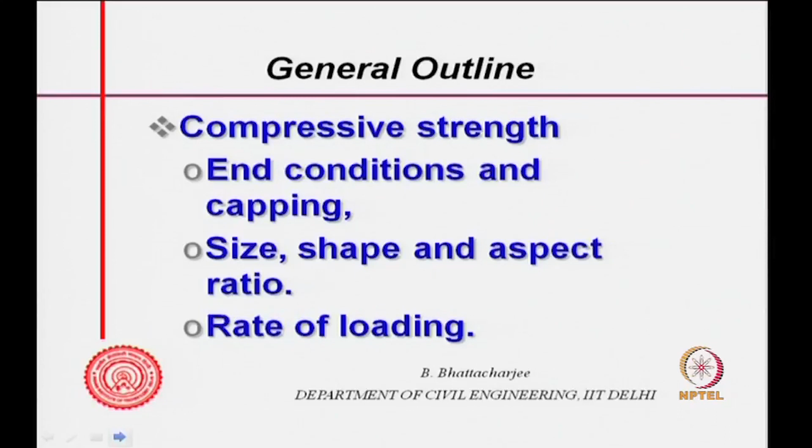So the general outline: for compressive strength, the factors which affect it are end condition and capping of the specimen, size, shape and aspect ratio of the specimen, and rate of loading. Then we will look into some aspects related to tensile strength testing.

For the compressive test, what we do is take a cube and apply load from top and bottom in a testing machine, where the load is applied through a hydraulic system, and we can also control the rate of loading, etcetera.

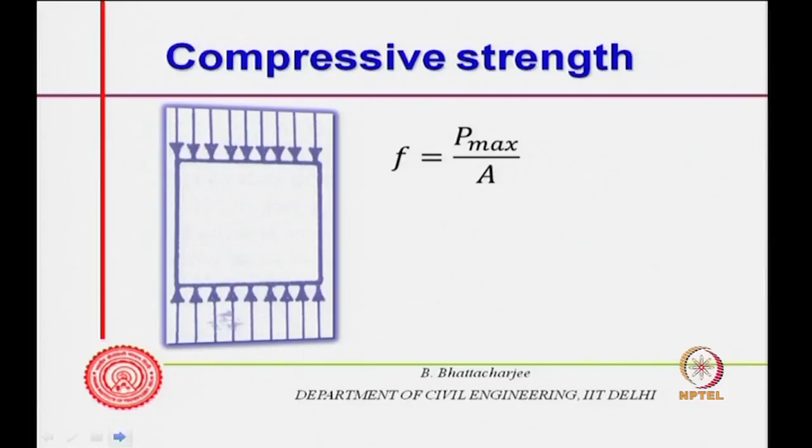So we apply load like this and define the strength as P max by A, that is a simple way of doing that. Test conditions induce variation in results, and that is what we are going to see.

Of course, therefore, I must have a standard test condition. If you recall, we talked earlier that the cube strength you get is not really a measure of the strength in the structure, because several factors affect strength in the structure differently from that obtained from the cube test. The levels of those factors are not the same, but it gives us a relative measure of the materials that have gone into concrete making.

Since the test condition affects my strength, I must standardize this test condition and use the same condition for all the cubes, so that I can only compare the materials.

So the standard test condition is given in codes. In the Indian scenario, it is given in IS 516, originally framed in 1959 or so, but reaffirmed possibly sometime in 2009. So it remains the same, still.

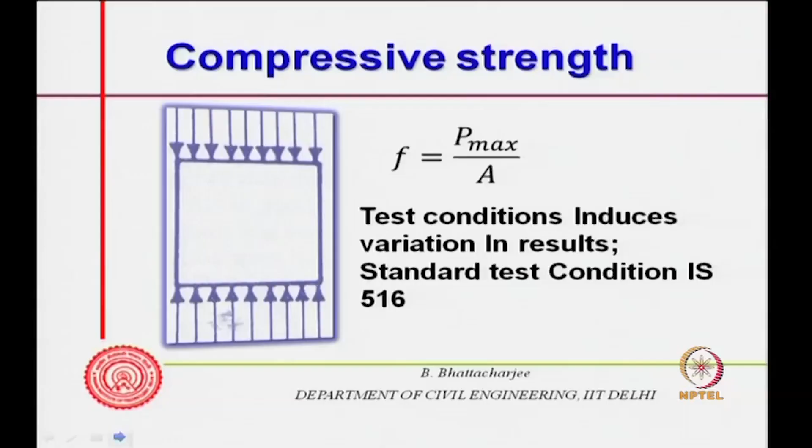What we do is apply a uniformly distributed load from the top on the cube surface, and at the bottom we assume there is a uniformly distributed reaction from the machine frame or machine plate. We apply the load also through the machine plate, and as we apply it, the reaction comes from the bottom and the concrete cube is crushed under those two loads.

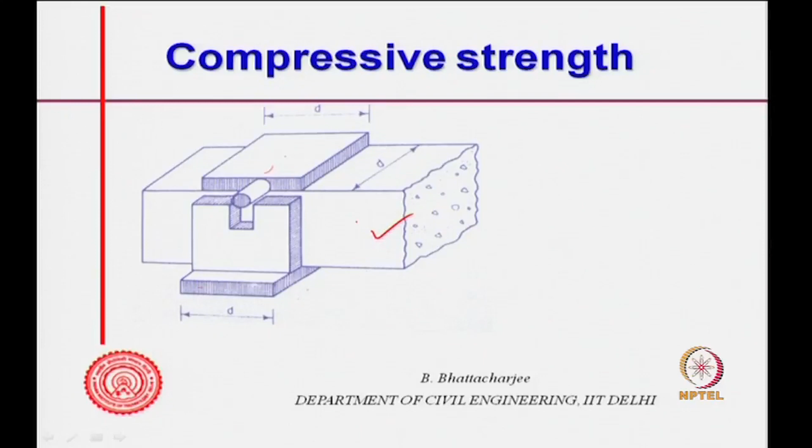Remember, this result is not the same thing. IS 516 gives a test on a portion of a beam which is not the same as the cube test; these two things are not the same. They give different strengths. But anyway, that is good enough for our purpose, because we are relatively comparing.

So compare these results only with other beam results, and compare cube strength results only with other cube strength results. Now, this beam method is not so popular, while the cube test is very popular, most commonly used. The beam portion test is rarely used actually.

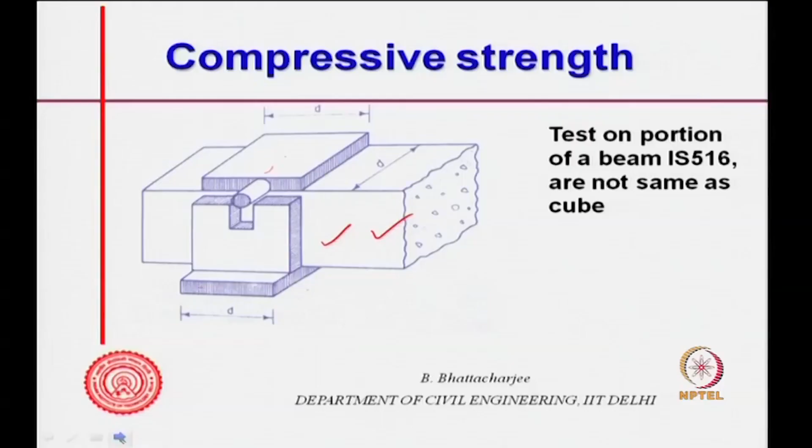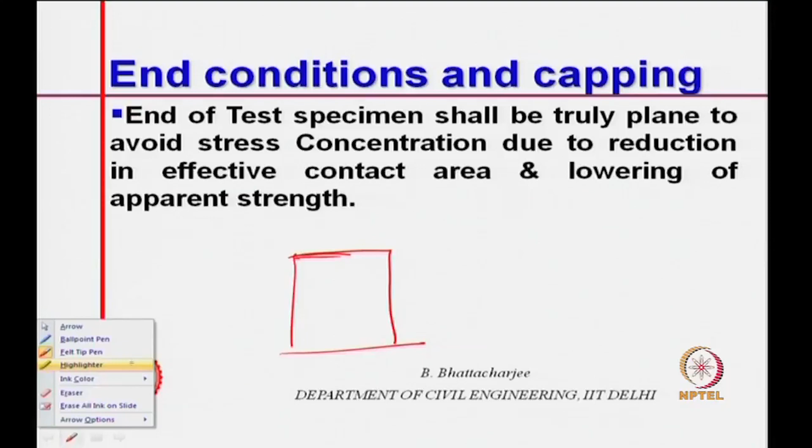Now, end condition and capping. End of test specimen shall be truly plane, first of all, this should be truly plane. This portion should be truly plane. Otherwise, the undulation, the contact area would reduce and there will be stress concentration, so effective contact area will reduce and apparent strength will reduce. So, therefore, this must be plane.

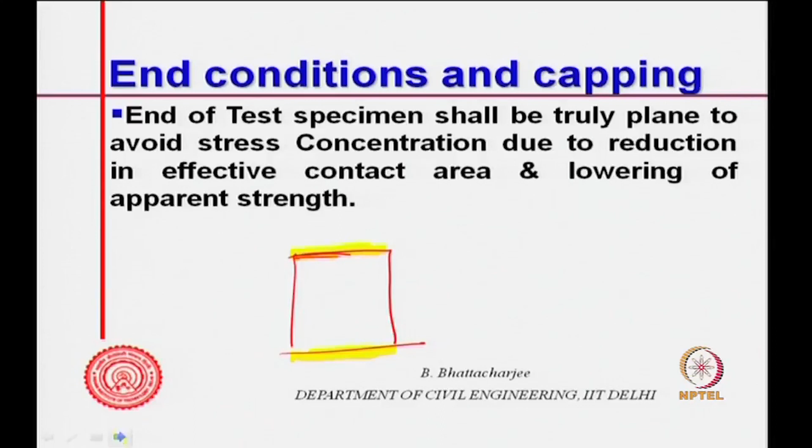And to do that, what we do is we cast against steel mold surfaces which are smooth, and therefore, it does not require any treatment. I will talk about capping a little bit later on. This is very smooth, and I put that below the loading plates, what we call loading platens. This portion was in contact with the steel mold during casting and not exposed to air. So, this will remain by and large plane if my molds are standardized and properly made within tolerances.

While we can do this for cubes, well, cylinder actually you cast in this manner, so this surface is always exposed. So, we apply load however through this. Anyway, for the cylinder scenario we can't avoid this, but we have to see that it is sufficiently smooth, there is no variation. Now that is as far as cubes and cylinders, largely cubes, are concerned.

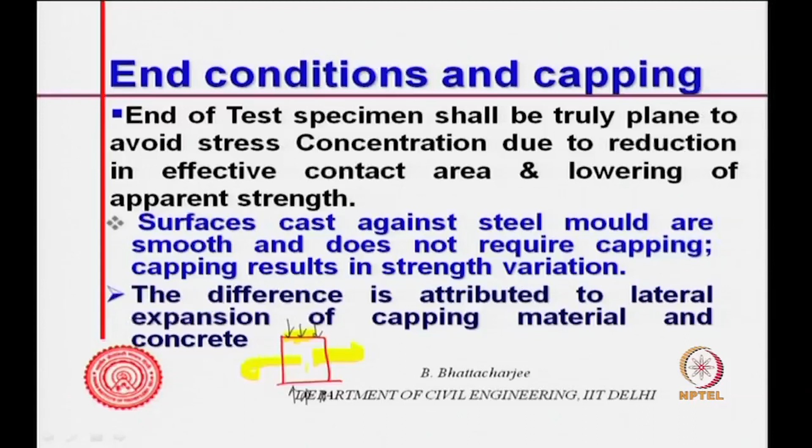Now, this variation or the difference that we get is attributed to lateral expansion of the capping material and concrete, relative to each other, both can be expanding. So, what you are doing when you are applying load on this, material here would be actually expanding. So, if you put a capping material here, this will also expand and concrete will also expand. It is related to this sort of expansion of the capping material and concrete. Let us see how it is, we will see right now how it affects.

Supposing I put different capping material, let us say first is alumina cement. So, I have made actually cubes or cylinders like this, and I am using different capping material here. They might be rough, may not have been smooth, etc. I am using different materials, whichever way, this is a result of experimental results. So, I am actually doing some capping, and the first material that I am talking of is alumina cement.

And the second one is gypsum plaster, third one is another gypsum plaster, fourth one is sulfur with filler, sulfur concrete with some filler, sulfur actually colloidal sulfur, yellow sulfur you might have seen, it actually melts. So, you put some aggregate into it, some filler, then it becomes almost concrete when it solidifies. So, the sulfur concrete. So, I can put some sulfur, plaster of Paris, calcium sulphate 2H2O that we know, and POP plaster of Paris with ordinary Portland cement.

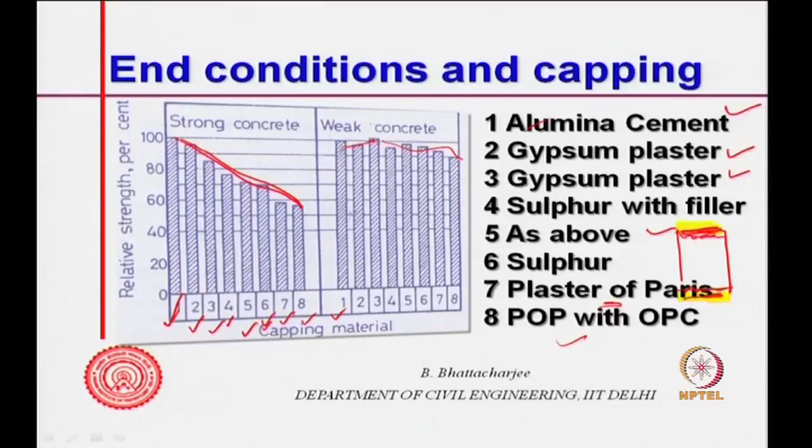So, you see if you have different capping materials, same cubes or same cylinder, if you look at relative strength, assuming high alumina cement gives 100% strength, for strong concrete it goes on reducing with the capping material, and for weak concrete the effect is somewhat less, in fact you find a slight increase. Well, this is a qualitative statement, not a quantitative one.

So, what we observe is that there is a variation, and it depends upon the type of capping that you are using. So, end capping has an effect on end condition.

Normally, if you do not have a capping, the machine plates are straight away coming in contact with the top and bottom, which are usually steel. So, you have steel plates, they come in contact with the

specimen itself, I mean the sample specimen itself, all right. Not sample, specimen, because sample would be a couple of specimens that would make a sample. So, specimen is from the sample actually. So, specimen, specimen itself, all right.

So, this is what is happening, machine plates coming in, and depending upon strong or weak concrete, the effect will depend. So, you see it depends both on the strength of the concrete, the quality of the concrete, as well as the effect of the capping material, which is again a function of the strength of concrete.

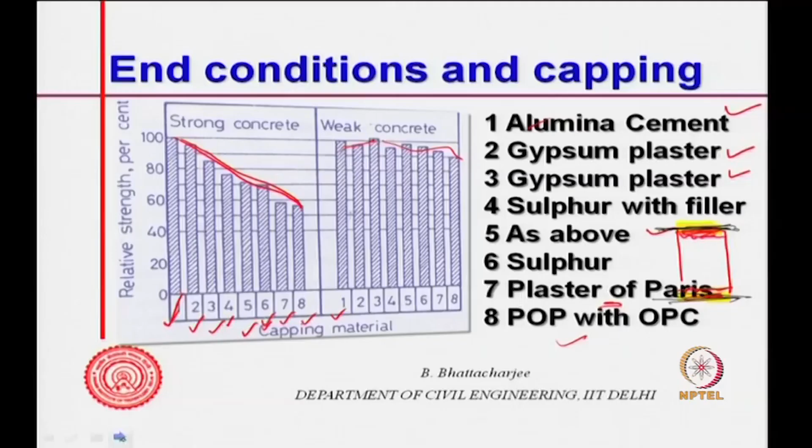It is a kind of non-linear situation. So, that is what it is, and therefore, this is an important issue - end condition and capping. Now, what is the mechanism?

Let us see if I have some diagram - some diagram right now I do not have perhaps. So, no problem, but explanation is there. Let me use my own diagram. Let me use my own diagram. Okay, the observation is, let us first use this diagram and then I will come back to it.

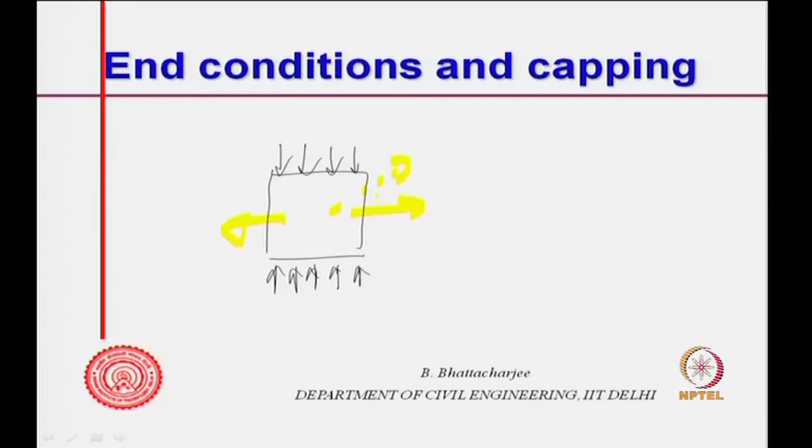Now, this is your cube, you are applying load like this, and we have discussed that my material will have a tendency, under this uniaxial compressive situation, to move along this direction as well as along these two transverse directions.

Now, if it tries to move along this direction, that means finally the failure is because of tension. Then the movement of this material along this direction is important.

Now, at this point, the movement of the material is restricted by the friction between the machine plate and the specimen. So, there is a kind of force acting like this - frictional force - which will not allow this movement.

Similarly, here this is a kind of frictional force which will not allow it to move along this direction. So, there is the surface, but then the surface material is in contact with the just-below next layer of concrete. So, if there is a force acting and it is trying to expand,

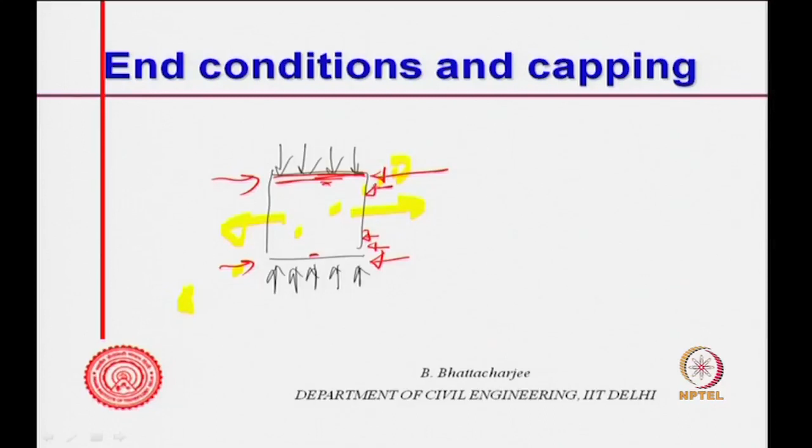it would also try to take the material below, but if there is a force opposing, this also will be opposed somewhat, but it would gradually get reduced. There is some sort of opposition to the movement here also, but gradually it will get reduced. In other words, these resisting forces would get reduced somewhat.

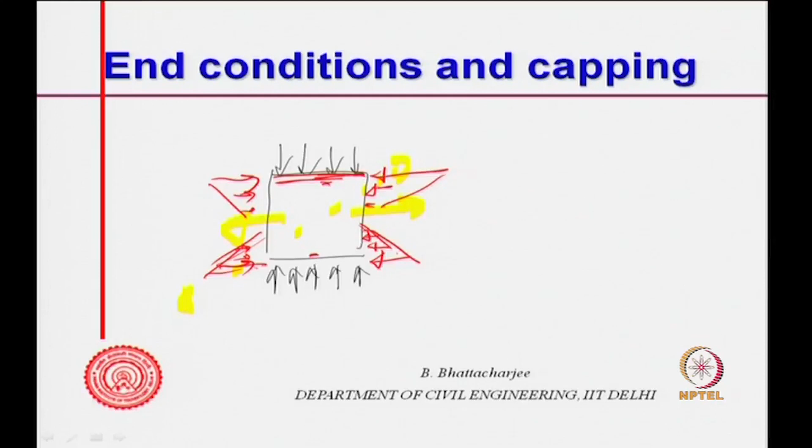So, you do not really have a purely uniaxial situation, you have a situation where there is some sort of force acting onto the specimen, depending upon the type of specimen, or L by D, up to some height there is a force acting like this also. This will depend upon this being your L and this your D, the dimension of the cube. So if it is D and D, then there is somewhat overlap, we will come to that just now.

So, you see there is an opposing force to the movement - horizontal movement or transverse movement - there is opposing force to transverse movement, both in this direction as well as in this direction there will be an opposing force.

So this opposing force, what effect does it have? The net effect is a compressive force acting like this at this point. Tension force will act normal to it, so it acts like this, and here also like this. Tension acts this way because compression is along this direction, net force due to the resultant of frictional resistance and the applied load.

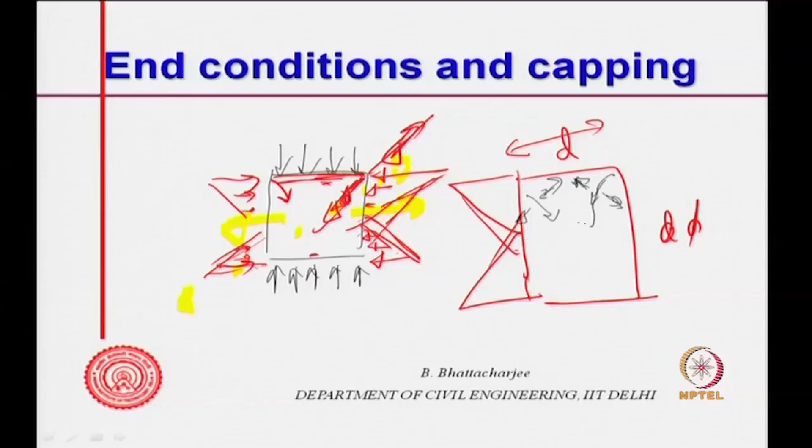Now, suppose I put a capping material here. Now the machine plate is not in direct contact with the specimen. The friction is between the machine plate and this capping material - the load comes from here and friction is somewhere here. So this material will try to expand in this manner, but will be resisted by the friction.

So it is Poisson's ratio which causes deformation along the transverse direction, and the stiffness of the material is an important issue. If it moves quite a bit compared to the stiffness, resistance to movement is less - that's a material property. For a given force, with different capping materials, the more it moves, the more it will cause the concrete to move along this direction.

So, in other words, let me put it here: higher nu, where nu is the Poisson's ratio, divided by E, the modulus of elasticity - more modulus of elasticity means less movement. So nu by E is the important ratio.

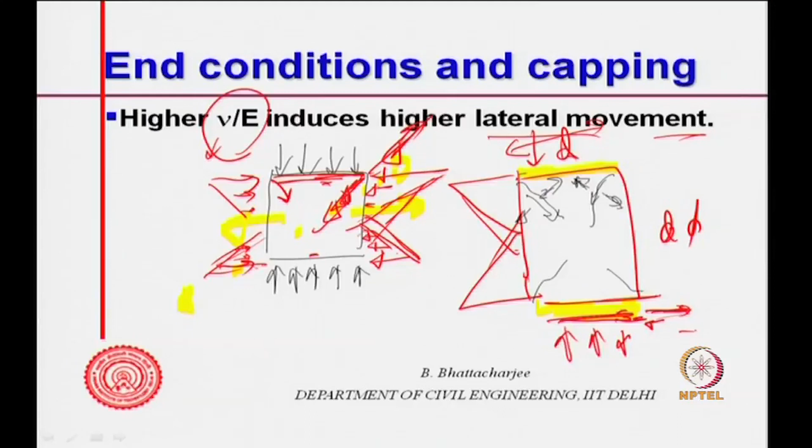If this is less, this term is going to be higher, and if this is more, this term is going to be higher. So higher nu by E induces higher lateral movement. That is what we have understood.

Softer and weaker material has higher expansion, and their lateral expansion is more than that of concrete. Therefore, if that moves, concrete will automatically also move, and the Platen effect will get reduced significantly. Softer and weaker material will reduce the Platen effect.

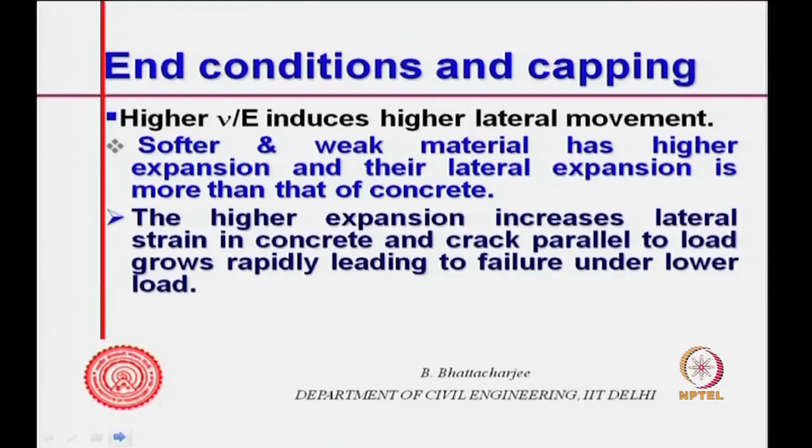The higher expansion increases lateral strain in concrete, and cracks parallel to the load grow rapidly, leading to failure under lower load. So if you use a higher nu by E material, that is, softer and weaker material, as a capping material, it will itself expand and will not restrain the expansion of concrete under the Poisson's effect. Therefore, concrete will show vertical cracks parallel to the downward load, and failure will progress under that kind of load.

For a strong capping material, the result is opposite. If nu by E is small, meaning the material has low Poisson's ratio and high E, very stiff, a stronger material has this behavior and would restrain the concrete, showing higher strength compared to the one with higher nu by E, because it restrains the expansion. The net effect is the material does not expand in the transverse direction, there is a restraint to that, so you require a higher load to cause failure.

So this is the effect of end capping, as we have seen. The end platens of the machine produce the same effect as a strong capping material.

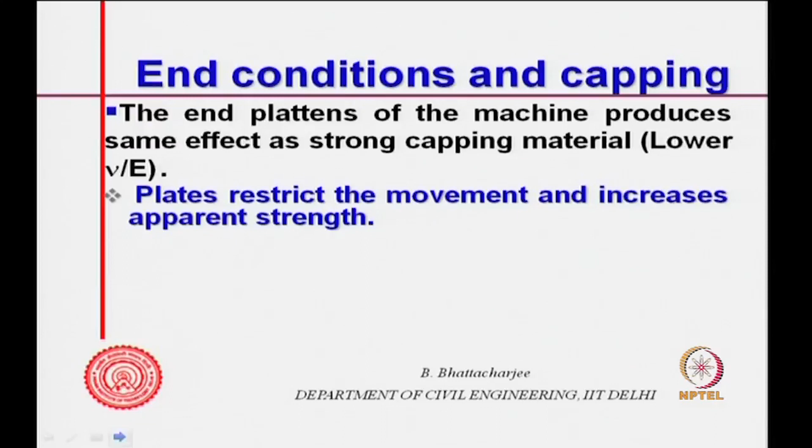The capping end platens, machine platens - because steel is a strong material, its Poisson's ratio divided by modulus of elasticity is relatively low if there is no capping material. Therefore, the plate restricts the movement and increases apparent strength.

So the degree of restraint depends on friction between plates and concrete surface, and for very low restraint capping material, wax - let us say if we put wax, the difference is quite evident from the cracking pattern. Wax has very low restraint, it does not restrain because it is low strength, weak material expands quite a lot, and therefore you find almost vertical cracks.

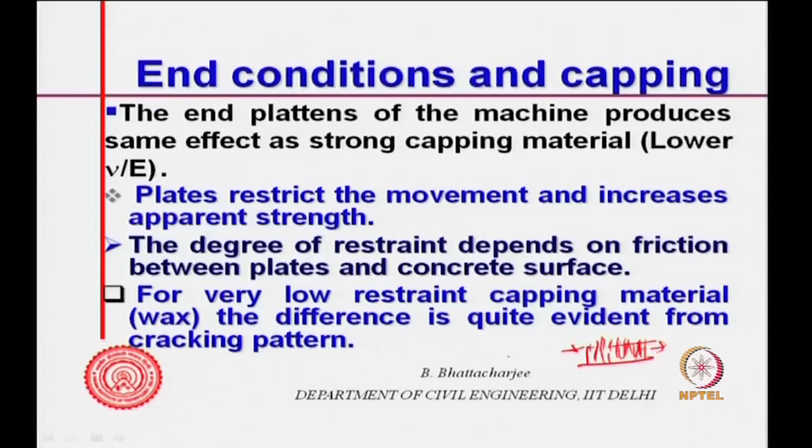Something similar, for example rubber or Teflon - it has high strength but low stiffness, so it allows expansion but does not fail itself, and therefore the effect of the plates is gone. There is something called brush platens, made of closely placed brush. You use a brush below the plate, so it can expand easily, being a steel brush, although it will not fail. That is the platen effect basically.

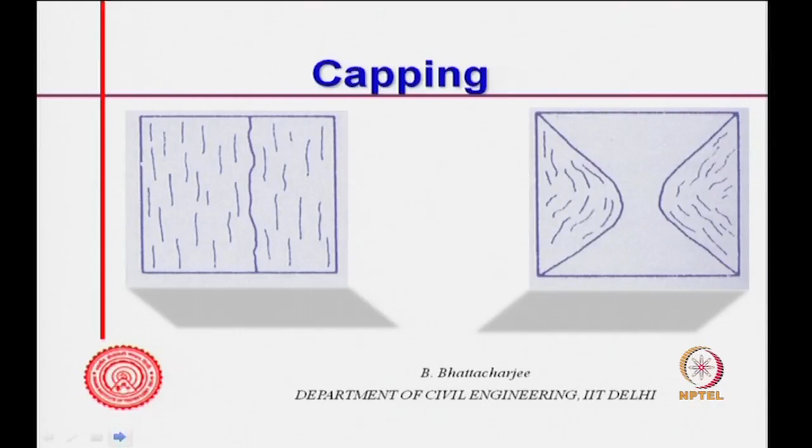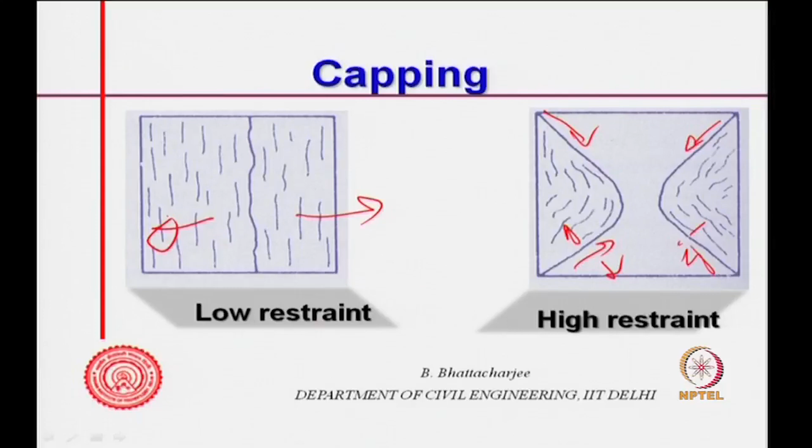If you have no effect, no capping, no restraint practically, versus high restraint - these are the scenarios: low restraint, high restraint. With high restraint, net compression will be along this direction as a resultant force, so transverse tension will act like this, giving you something of this kind. With low restraint - wax or Teflon or brush platen effect - cracks would be vertical because of the failure due to Poisson's effect. This aspect has to be taken into account.

So we got the failure of the cube like this - this is the cube failure, as shown earlier. In the beginning, cracks will come like this, then this is the shape that you get, and in some cases you go further and get a shape like this. This is the portion which does not get failed - this is the final portion. So the platen effect acts like this.

Due to the platen effect, it is like this, but the restrictive effect is limited up to a certain distance from the plate. What is important is L by D. Up to a certain portion this is effective - this platen effect acts up to a certain point, it does not act over the full length. In this direction also it will be there, acting like this.

Now how much is this distance? This distance is related to d - it has been observed that up to about 0.86 d, the end of the cylinder diameter, this effect will be there. So if this is d, this distance will be 0.86 d on this side, and 0.86 d on this side also.

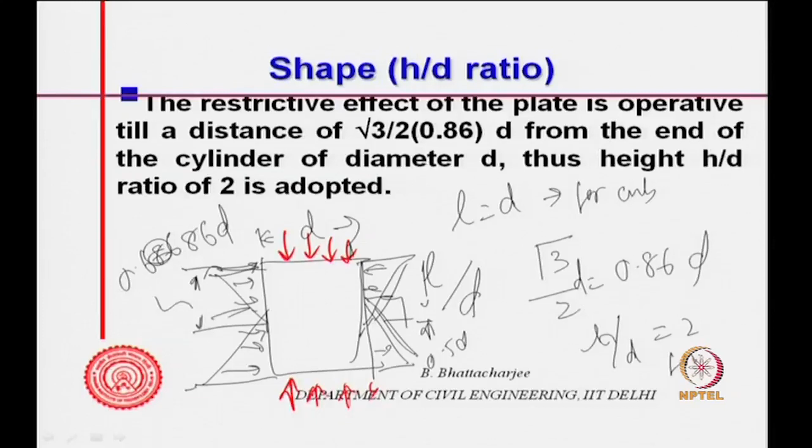So, in that case what is happening? A cylinder, h is equals to 2d, at least this is 2d, the platen effect will finish up to 0.86d. So, this is 0.86d and so on.

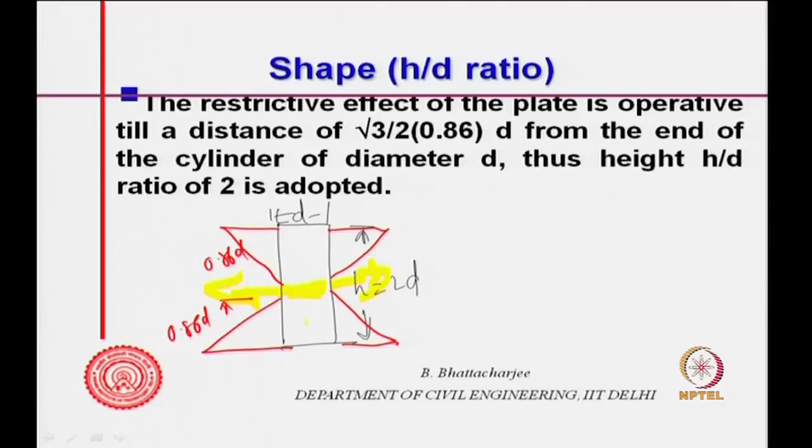So, there is some portion where you have no platen effect, it will expand easily, along this direction. So, therefore, we adopt h by d equals to 2 and we find the strength is lower, in case of cylinder, right, strength is lower in case of cylinder.

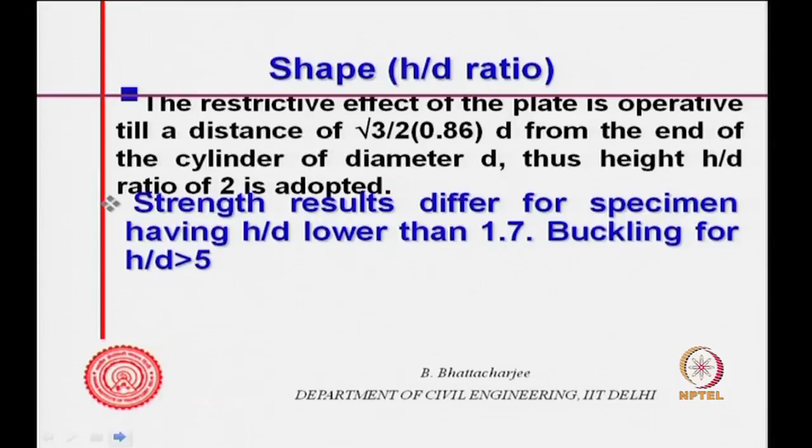Okay, so strength is lower in case of cylinder. Strength result differs for specimen having h by d lower than 1.7. When we ask why it is lower, some people say buckling. Well, buckling occurs when h by d is greater than 5. So, it is simply because of platen effect, cylinder strength is lower than cube strength, right, cylinder strength is lower than cube strength.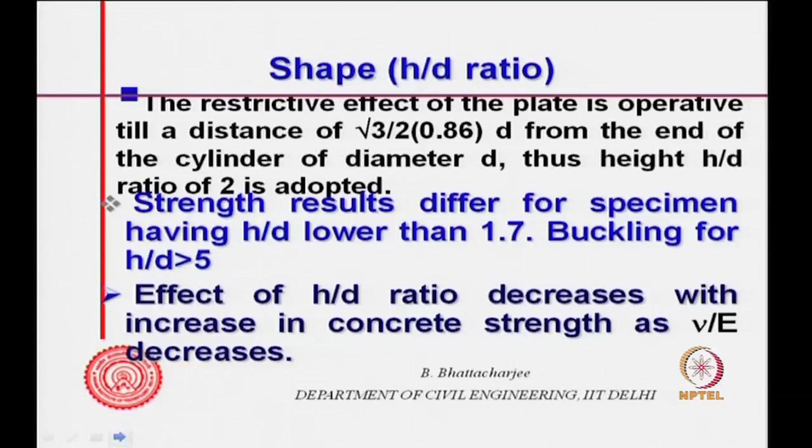Effect of h by d ratio decreases with increase in concrete strength as nu by E decreases. So, if you have higher strength concrete, E is more, nu is also relatively lower, so nu by E will be lower for higher strength concrete. So, this nu by E increases depending upon the concrete itself, because expansion of the concrete is important, right.

In weak concrete, restraining effect will be more, because it wants to expand, but if you are not allowing it, this effect will be more, and you can see how the capping material has actually affected it. So, depending upon the strength of the concrete, relative motion of the concrete with respect to the capping material would differ, and that is what it is.

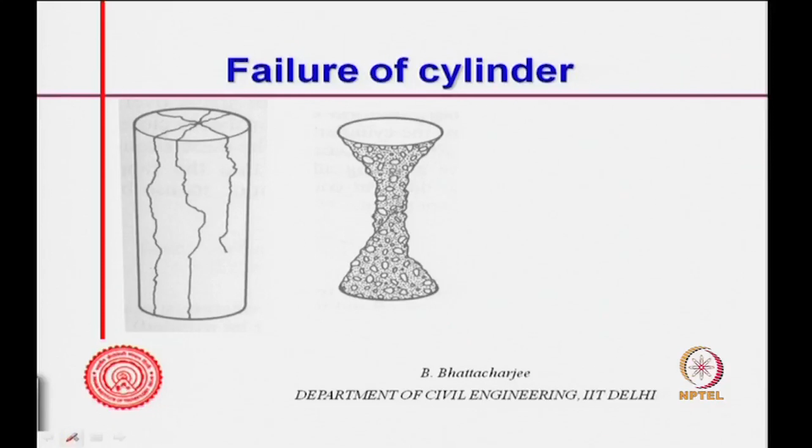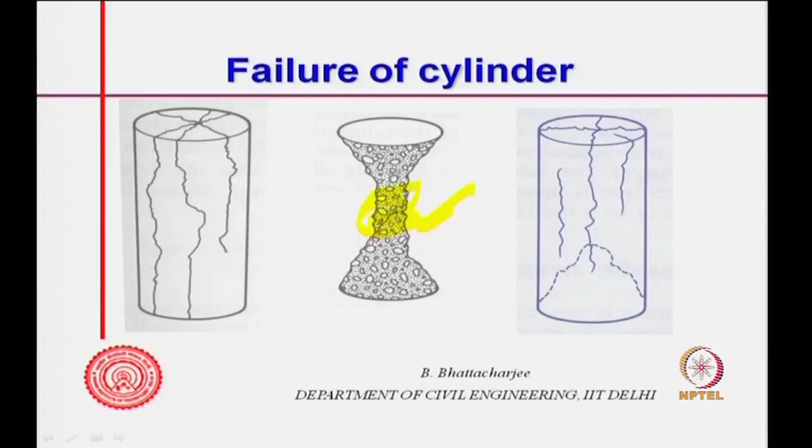So, in failure of the cylinder, you will always see vertical cracks somewhere. You might see something of this kind, and you might see something of this sort. So, cylinder failure pattern is something of this kind. That is because in that portion there is hardly any platen effect, and therefore, it shows vertical failure pattern.

People have done some experiments, and it has been observed that as you increase the h by d ratio, height to diameter ratio, relative strength changes. If at 2 it is 1, at 0.5 L by D ratio, it is something like this, and it also depends upon the strength. For example, higher the strength, behavior is somewhere here, lower strength behavior is somewhere here.

So, that is because of the L by D ratio effect. Similarly, if you have a situation where you put in some packing, earlier this was related to H by D ratio; we have changed that. So, we have said that if the H by D ratio is high, platen effect reduces, and therefore, strength tends to become similar. Now, if I put some packing, same aspect of capping actually, first case is no packing, second case is 8 millimeter soft board.

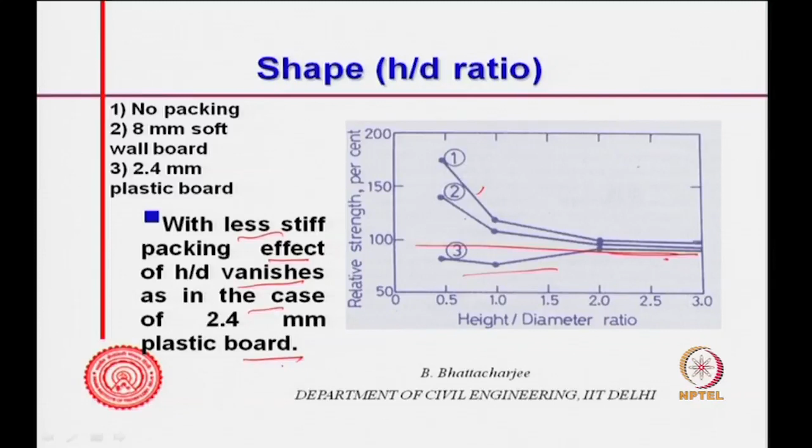With less stiff packing, the effect of H by D vanishes, as in the case of plastic board, because plastic board has got low modulus of elasticity and high Poisson's ratio, so nu by E is now actually large. So it can deform itself and allow the concrete to expand, and therefore this effect is simply not there, or very little. This is what L by D ratio, cylinder strength and all that relates to.

When you are measuring cores, as I said sometime we do testing of core, you are measuring the strength of the core, and different H by D ratios exist. If you consider this as 1, American Society of Testing Material gives a correction factor: for 2 it is 1, correction factor for 1 is 0.91. That means the cylinder with an L by D ratio equal to 1 would exhibit higher strength, so the multiplying factor is 0.91.

So convert the cylinder, convert the L by D ratio - this is L, this is D - so convert strength obtained for L by D ratio 1 cylinder to L by D ratio 2. What you do: you multiply this by 0.91. So you can see the strength is higher by 1 by 0.91, around 10-11% higher according to ASTM code. This is of course judgmental. If you see British code, this is 1 by 0.92, Indian standard 516, 0.89.

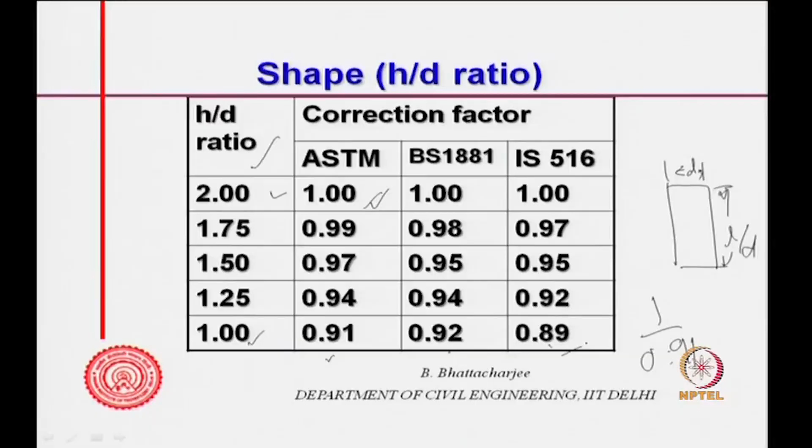Everybody takes somewhat lower value. That is, of course, for core.

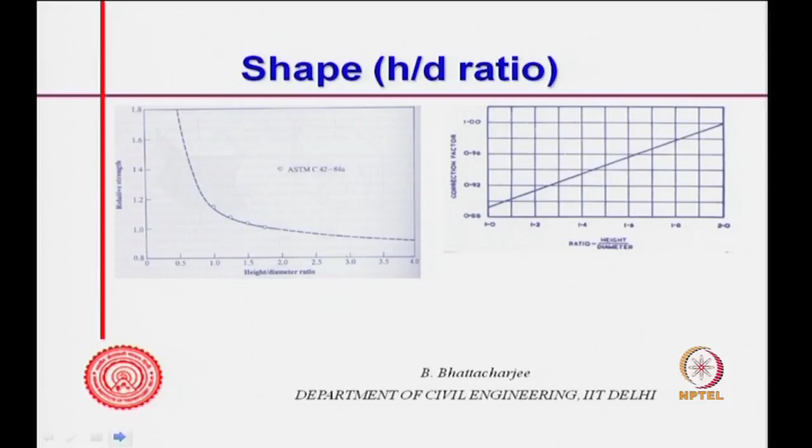Now a lot of people have actually tried to find out the ratio of cylinder strength to cube strength, at what point they are same. Obviously it will show large scatter, but typically it varies with the strength. Higher the strength, the relative cylinder to cube strength ratio increases, because capping and platen effect are also functions of the strength. But normally in general we use 0.8 as the ratio of cylinder to cube strength.

So specimen shape has got a role, capping has got a role. While Indian standard uses a 15 centimeter side length cube, some other places use a 15 centimeter diameter cylinder, their strength would not be same. So it depends upon specimen type, L by D ratio, and also what kind of capping you are using. Long cracks initiate fracture earlier in a larger specimen.

Now size is the other issue - dimension of the specimen. If the specimen size is large, then it fails at lower load. Why? Because long cracks initiate fracture earlier. So in a larger specimen you are likely to find a longer crack or longer fissure right in the beginning, and therefore in a larger specimen one is likely to find a longer crack, thus lower strength results. This is something called the size effect. Larger the size, lesser is the strength.

Experimental data for cylinders exhibit reduction in strength compared to a 150 mm specimen for larger diameter. So if one does this systematically - but then the error is so much in our normal testing that capturing the variation is not very easy. You have to do a lot of tests actually.

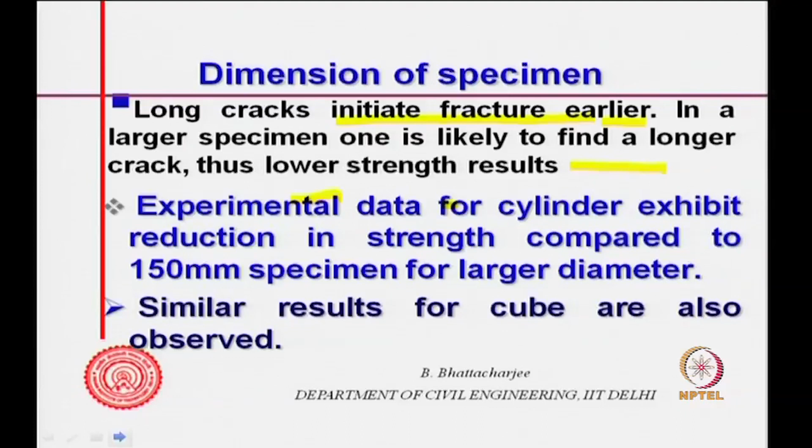For example, just doing 3 cubes of 10 centimeter side length, 3 cubes of side length 150 mm, and 3 cubes of side length, let us say, 200 mm - so 9 cubes you test, 3 of each size, and find out the mean. You may not find the variation, because the error in the tests, due to all the factors involved, may simply mask the effect of size. But if you do a large number of tests, then this effect you do see. So people have done some testing and observed this for cylinders and cubes as well. Let us see what these are.

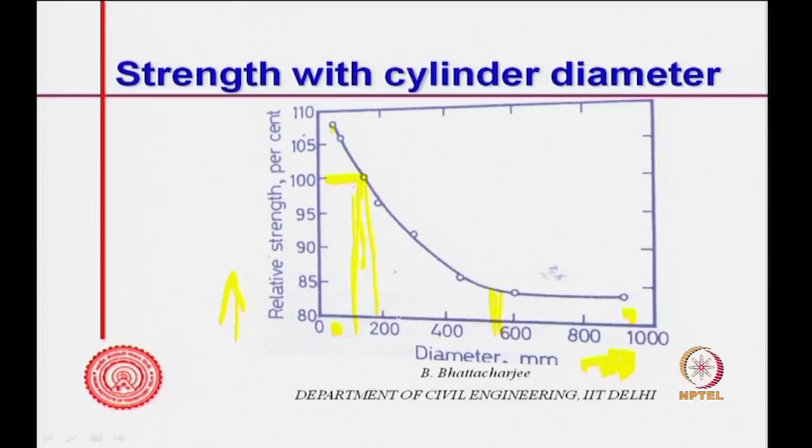For cylinders, it has been observed that if diameter increases, assuming 100 corresponds to a 150 mm cylinder, the relative strength changes. If the size is smaller, strength is higher; if size is larger, strength is lower, but beyond 400 and 500 mm diameter, strength does not change because the crack sizes are unlikely to increase further. This is the observation for cylinders, which is why size is standardized.

For cubes, some results are available. Say the side length is 70 mm, then relative strength is 1.0; for 100 to 150 mm it is also 1; for 200 mm maybe 0.95; for 300 mm, 0.90. So you can see the size of the cube is important.

If you are using a 150 mm cube size, which is standard, that cannot be compared with any other size. Some European codes and many countries allow testing different sizes of cubes, but this is only for comparison purposes, and only with the same size. Supposing I am using a 100 mm cube, I must compare different concretes using 100 mm cubes only. In Indian scenario, we use 150 mm cube, but in laboratory sometimes people might use 100 mm cube, and then 100 mm cube results have to be translated to 150 mm cube results.

It is not the same. Similarly, for cylinders, somebody might use 100 mm diameter by 200 mm length, h equals 200, or somebody might use 150 by 300, which is standard in many countries, but then comparison must be 100 mm dia to 100 mm dia, 150 mm dia to 150 mm dia. So size is important. This is the other test factor which is very important.

So loading rate is also important, and many people seem to miss this. The testing machine used for cube test specimens in concrete construction must have a mechanism to control the rate. Ultimate strain is attained early at a lower rate of loading due to creep. Supposing we assume that strain is where fracture occurs, the rate of loading has a relation, a kind of effect on strength.

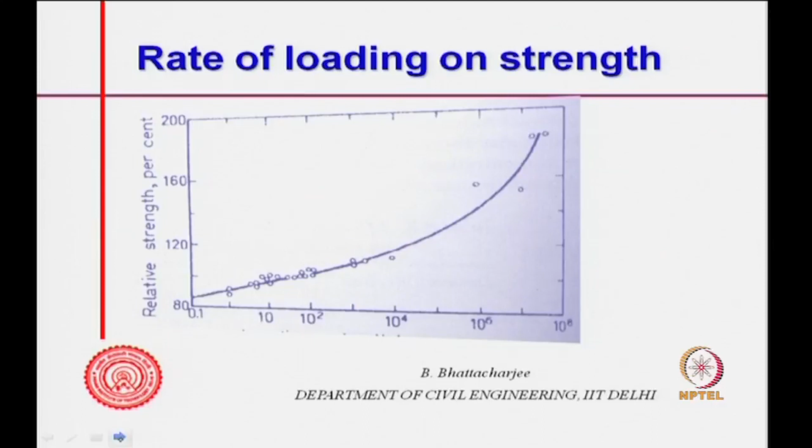For example, if you plot strain rate per second against measured strength, higher strain rate means strength increases, lower strain rate means strength decreases. Similarly, for loading, if you see relative measures of load per second, higher rate of loading means relative strength increases.

At higher rate of loading, whether it is strain controlled or load controlled, these are not the same thing. Load is easily controlled by a hydraulic system, while strain control requires measuring the strain with a feedback loop that changes the load, so it requires a kind of controller. We won't go into that now, but whatever it is, rate of loading is important. Higher rate of loading tends to show higher strength.

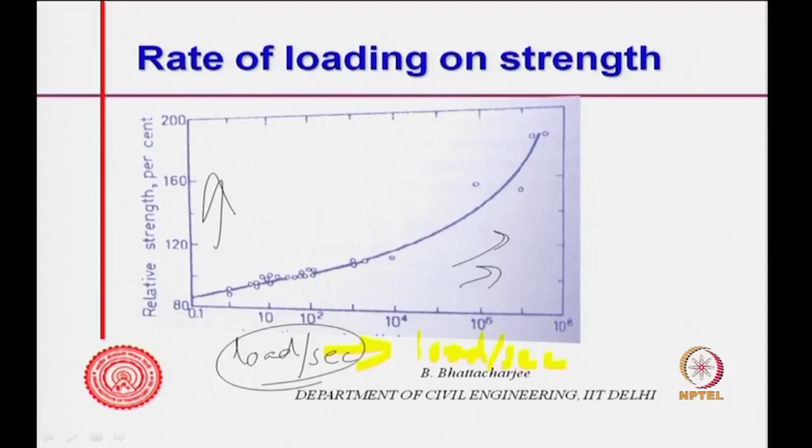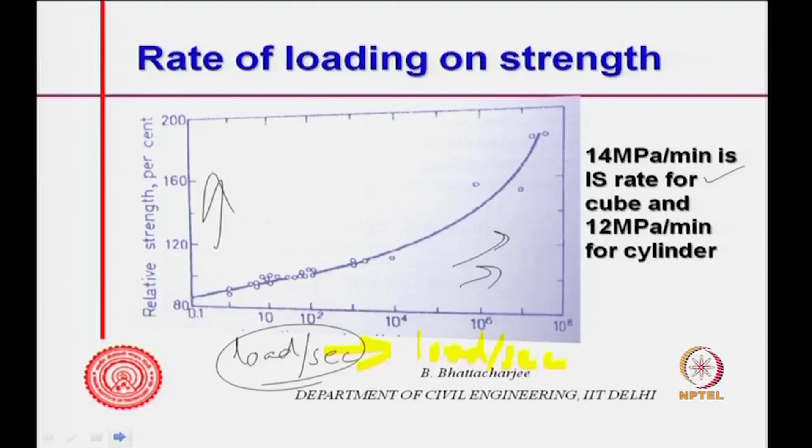So therefore, what have codes done? The Indian code uses 14 MPa per minute as the rate for cubes and 12 MPa per minute for cylinders. By and large, worldwide similar rates are used, 14 MPa per minute rate of loading. This is very important in quality control, because the machine must have this capability to control this rate, and this has to be checked quite often in case of acceptance of concrete, etc.

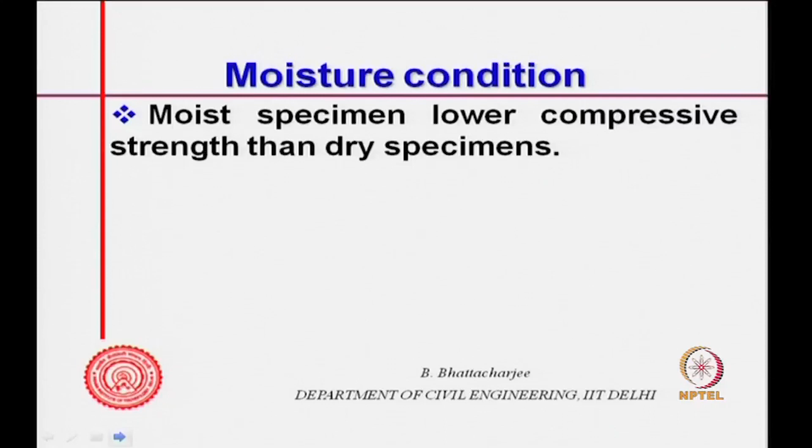Moisture condition: moist specimen has lower compressive strength than dry specimen. I mentioned this the other day, because if there is adsorbed water. Now, what is adsorbed water? Adsorbed water, vapor can be adsorbed, that forms a layer.

As you know, water is a dipole, H-O-H. The center of positive charge is here, negative charge is here, at 105 degrees or some such angle, whatever it is. So this is definitely not 180 degrees. So therefore it can form a dipole, and this water can get attached to charged solid surfaces in case of very fine particles like clay or cement gel, cement hydrate gel.

They are adsorbed waters, we talked of this earlier. This adsorbed water causes dilation of cement gel, lowering cohesion, resulting in lower strength. If you have moisture water, absorbed water is by capillary suction. So even capillary suction absorbed water, the water that goes in, also results in lowering of cohesion, because it is absorbed by surface tension forces. So change in surface energy and all that occur, and that results in lower strength.

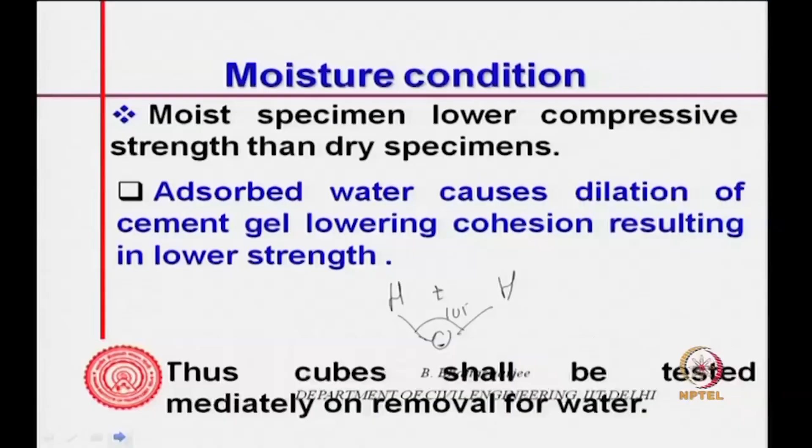Thus cubes are to be tested at a standard moisture condition. You have a saturated surface dry situation, and the code tells you within how much time you should wipe off the surface, then expose it for a certain period of time, and within how much period of time you should be testing. So moisture condition is an important issue.

So that is what we have. What we have seen for the cube: first we have seen capping and size, I mean aspect ratio, L by D or H by D. Then we have seen rate of loading, moisture condition, size of the specimen. So all these factors affect the strength.

Therefore codes standardize these conditions, and except for the material, the composition, the concrete that is produced - therefore I can compare relatively the material or composition that has gone into making the concrete. The concrete produced as a material - so concrete material's relative performance in terms of strength can be compared by cube test or similar tests.

So let us look at tensile strength. How do we measure tensile strength? It is actually difficult to measure tensile strength directly. One can use what is called a briquette test, something of this kind of specimen.

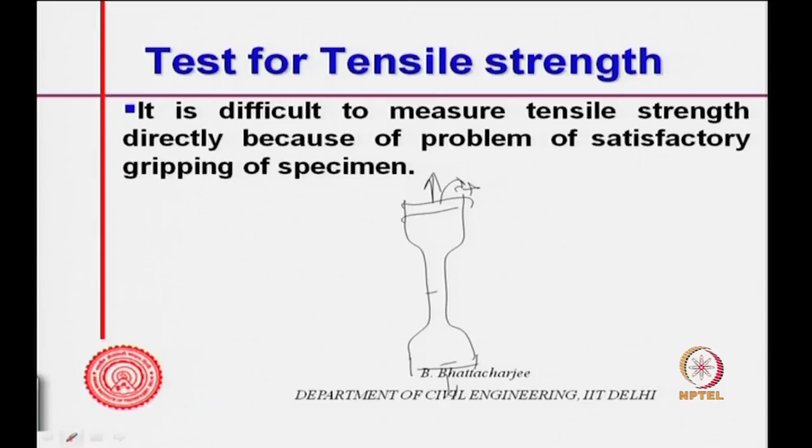Directly, but gripping this specimen is fairly complicated. You have to grip it here and pull. If there is any horizontal load, any moment or anything of that kind coming in, that can create problems and just cause it to fail here - may not be a tensile failure. So pulling it and all that, there is some amount of complication involved. Therefore this test is not done. This test is not a preferred test for concrete tensile strength, and direct tensile strength is rarely used also.

So what we use, sometimes we use, but let us see, we have a better method. Since we have a better method, we use that easier method. In case of flexure, it is not direct tension - tension in some part, compression in some part. Direct tension means the full specimen is under tension. In case of flexure, the full specimen is not under tension, only a part, and tensile stresses also vary, we will see that. So this tensile strength in flexure, we test by what is called the modulus of rupture test.

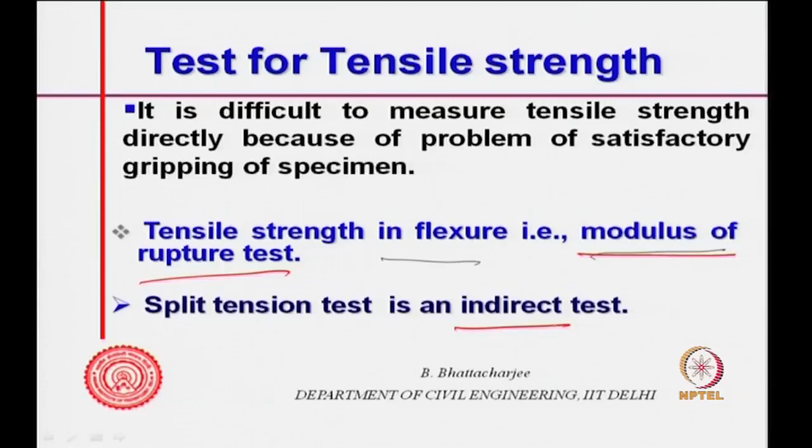We do the modulus of rupture test. Then for direct tension, split tension test is done, but this itself is an indirect test - indirectly we measure the direct tensile strength of concrete. So this is called split test, split tension test, Brazilian split tension test, and so on and so forth.

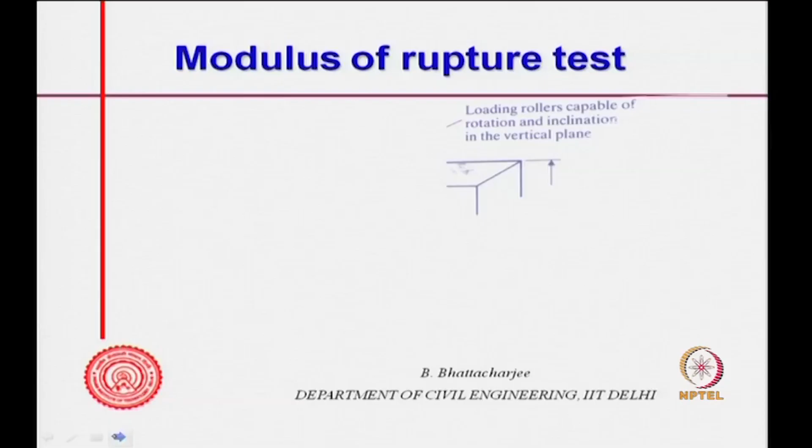In case of modulus of rupture, what we do: we have the beam specimen, supported on 2 rollers, in 3D. The spacing is the same and load is applied to 2 rollers, P by 2, P by 2. So you apply P here. Generally this is 50 centimeters total as per IS, this is 40, so 13.3, 13.3 you apply the load, and this is D dash.

This is some dimension, depth. This is D, this is B, and this is D dash. Usually square, 10 by 10. So D dash is equal to B. You can apply it sometime, but not necessarily - the principle does not require this.

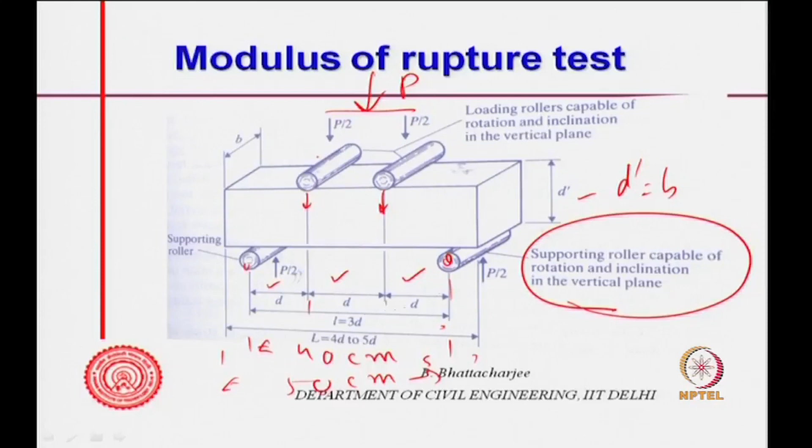Loading rollers are capable of rotation and inclination in the vertical plane. That means you are only transmitting downward force, because they are roller point loads. So if this bends, it is capable of rotation and getting inclined in the vertical plane, and will not apply any other kind of force except this type. These are the supports - supporting rollers capable of rotation and inclination in the vertical plane, same thing, so it will only give you point load. So actually you are trying to put a point load, and that is how it is.

So what will happen? I will have a bending moment diagram of this form, P by 2, P by 2, here L by 3, from the center L by 6, L by 6. So your bending moment here is L by 3 into P by 2, so the bending moment will be simply P by 2 into L by 3, which equals P L by 6. The maximum stress Z value, the moment of resistance, will come out to be P L by B D square, because the Z section modulus is B D cube by 12 divided by D by 2, so this is simply B D square by 6, and therefore M by Z will be P L by B D square.

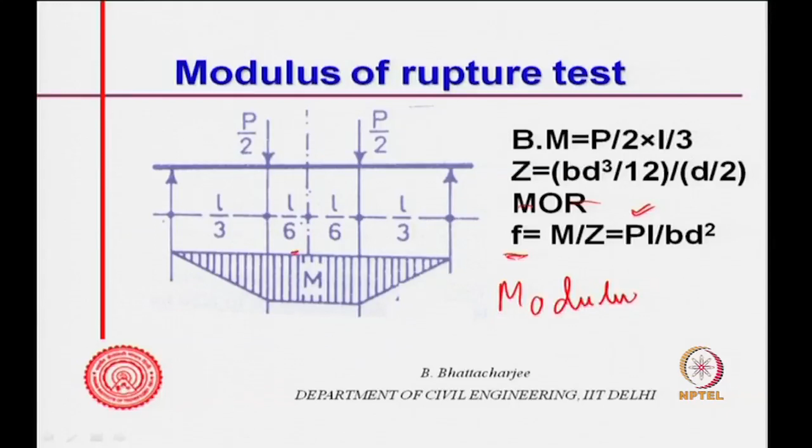So at failure you find out what is the P value at failure, and the corresponding F value is called modulus of rupture, MOR. It is actually a measure of the flexural strength - MOR, modulus of rupture, is a flexural strength.

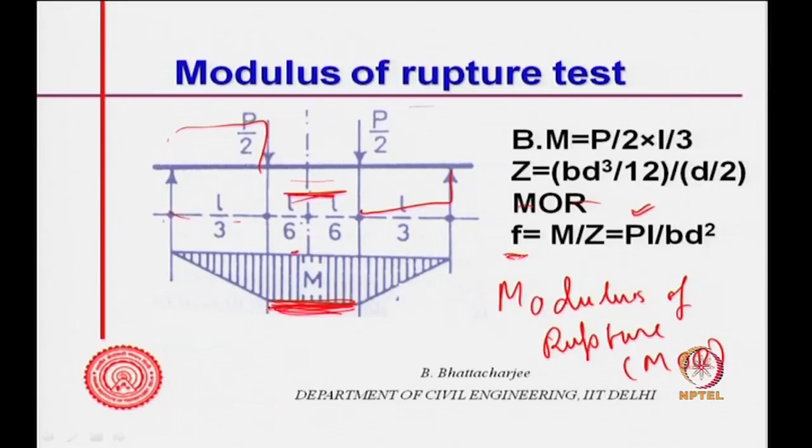Now why do we choose this? Bending moment is constant here, with zero shear stress. If I look at the shear diagram, it would be something like this - there will be no shear stress or shear force here. So I am trying to actually minimize the shear stress and have only bending moment - it is a pure flexure within this zone. Also, if it is a single point loading, you will have only one point, and failure may not have occurred within that. So here you are increasing the chance of failure due to pure flexure by putting 2 point loading - no shear force, pure flexure, and so on.

Now people do, of course, use different dimensions - case 1 is single point loading, case 2 is 2 point loading, the variation is there, but this 2 point loading is what has been standardized. Obviously it will change with the dimension, like we said for cubes.

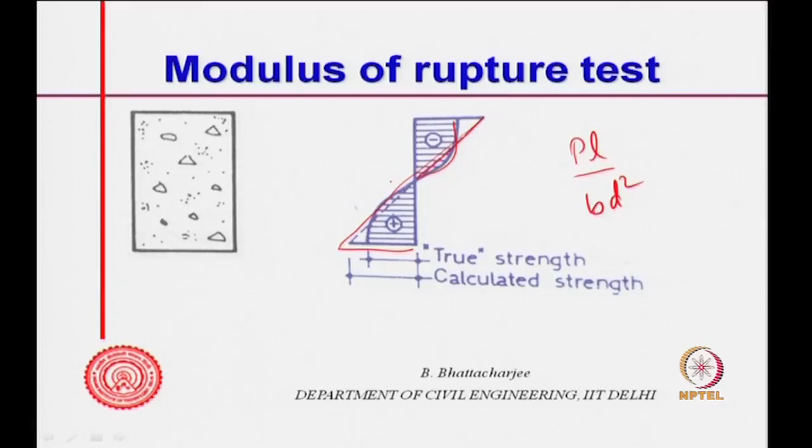You see, the modulus of rupture value that I am calculating assumes the stress diagram is like this, that P L by B D square that I obtain. I assume the stress diagram is linear, but the real stress diagram will be something like this. So you see, MOR actually overestimates the result a little bit.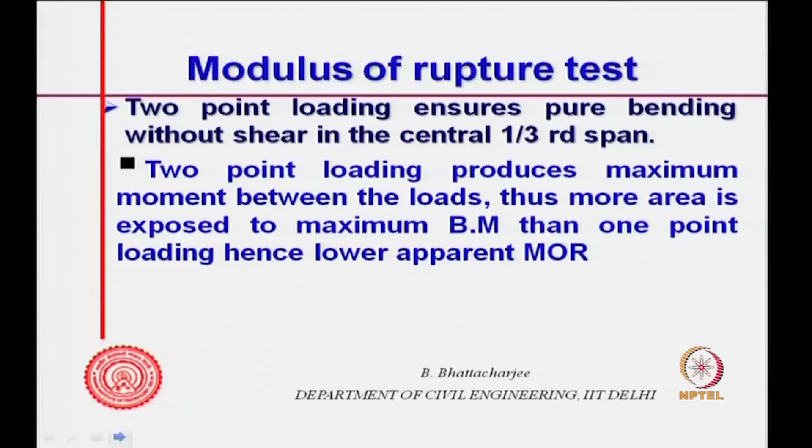The 2 point loading ensures pure bending without shear in the central one-third, as I said, and 2 point loading produces maximum moment between the loads, thus more area is exposed to maximum bending moment than 1 point loading, hence a lower apparent modulus of rupture. Calculation of MOR assumes triangular stress distribution, but the actual stress distribution is different. So modulus of rupture therefore overestimates even the flexural strength, but we will see that the other kind of test results, that is split tension test, which we will discuss, gives you lower strength than modulus of rupture - but if you are able to do direct tension, that will give you still lower.

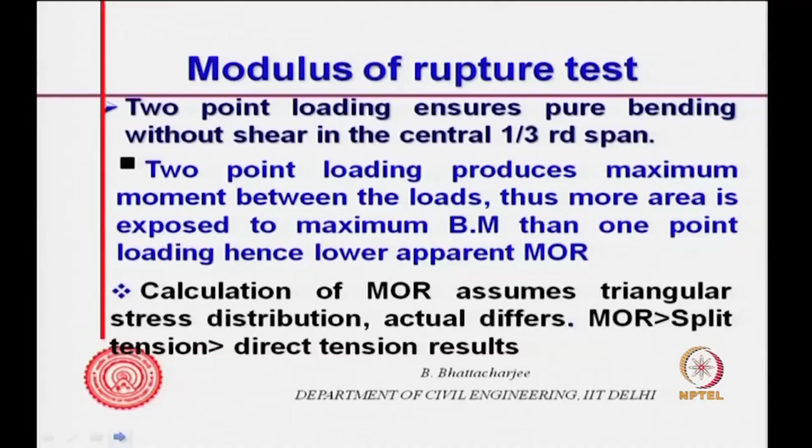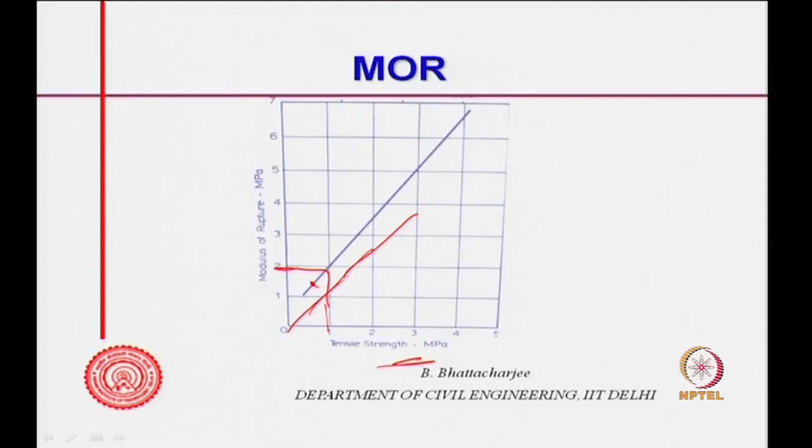All right, so what is split tension test? This is tensile strength, modulus of rupture, and this of course is direct. They are linearly related, but this is always lower - not a 45 degree line, it is somewhere here. So when this is 1, it gives you somewhat higher value. So the direct tensile strength, or tensile strength, is usually lower.

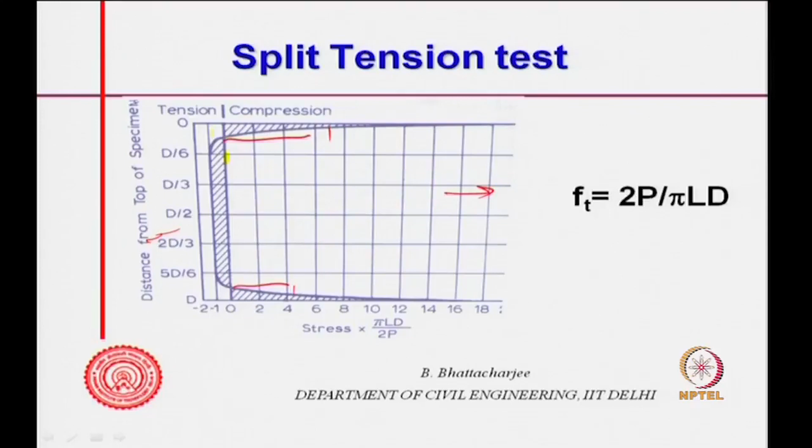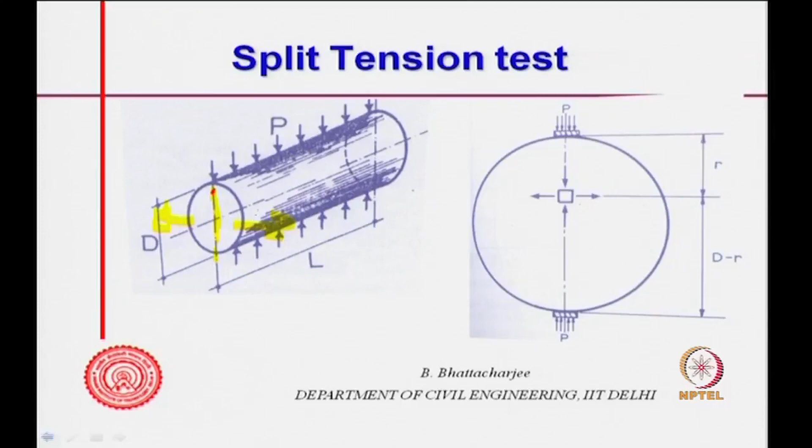So Ft, the tensile strength, is given as twice P by pi L d, where P is the load applied, L is this length, and d is this dimension, as shown.

At failure, if you take P maximum, this will be your tensile strength.

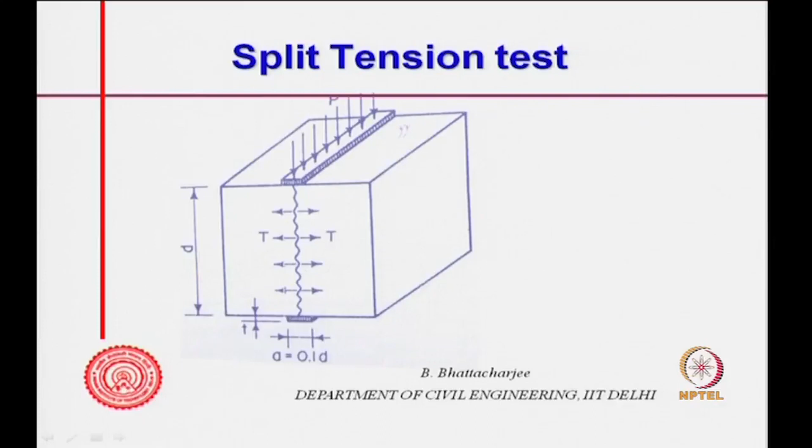Split tension test can also be done on a cube. In that case it will be like this: you apply P here, and the formula is Ft equals twice P by pi d square.

This gives you lower strength than modulus of rupture, because in modulus of rupture only the bottom fiber is subjected to maximum tension, others are not. Besides that, you are actually overestimating, since you do not take the actual stress-strain diagram.

Split test shows lower strength, and direct tensile strength will show still lower, because in split there is at least some compression portion. There is non-uniform stress distribution in MOR (modulus of rupture), and the split test impedes the propagation of the crack, thus delaying failure. Therefore this is the case.

We have discussed this: crushed aggregate exhibits better modulus of rupture than rounded aggregate, because of bond, and moisture condition also affects bond. So bond is very important in split testing. Crushed aggregate, with its rough surface, shows better modulus of rupture.

There would be more undulation in the case of crushed aggregate. For rounded aggregate, the surface differs, so the split test result might differ.

Moisture condition also influences the result, but in a different manner. Higher moisture content, as I have shown in the diagram earlier, actually shows higher tensile strength, unlike compressive strength.

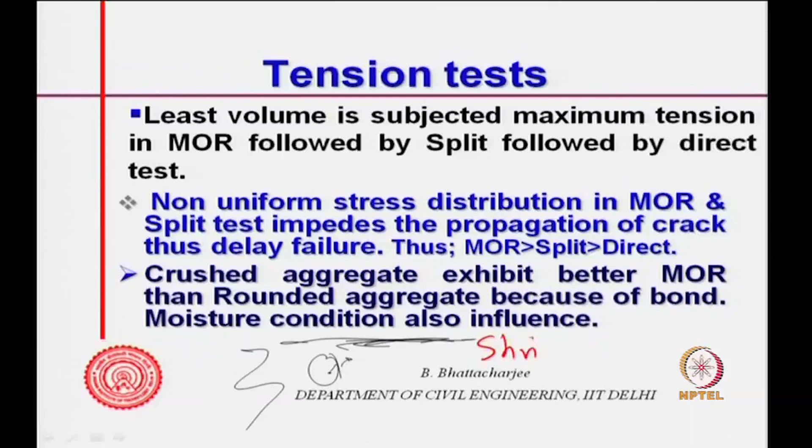Why? Because moisture minimizes shrinkage, while in a dry specimen shrinkage comes into picture. In a dry specimen there are shrinkage cracks which will always be present, and the tensile strength becomes lower, both for MOR and for direct tensile strength.

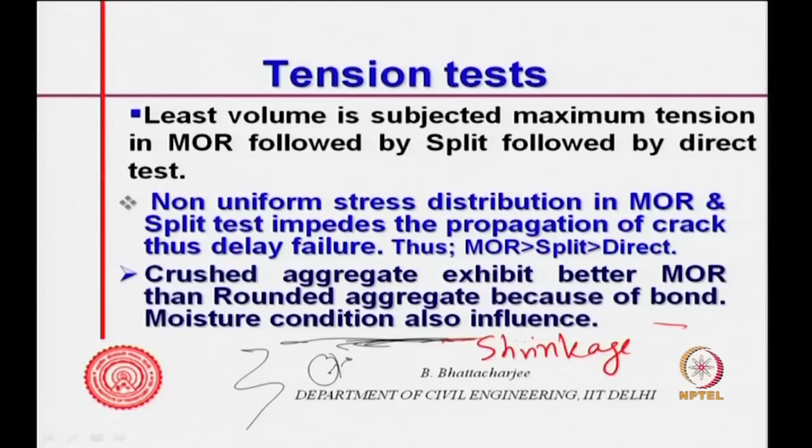So moisture condition, aggregate type, everything affects this. What we have seen for compressive strength—the effect of test factors like L by D, H by D, capping, size, rate of loading—we have seen finally that it is a relative measure of the strength potential of the mix, that is what it is.

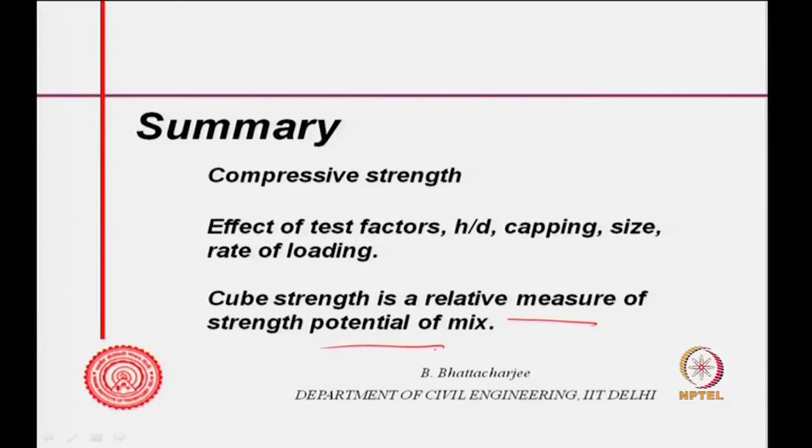Tensile strength also varies with the type of measurement. Modulus of rupture gives you a higher value. The code of course uses a different one, which we will be talking about in the next class, or I think we have already talked about this.

The code gives 0.7 under root FCK. These are conservative values used for design, based on relative measures, but test conditions affect how strength is measured, that is what we have seen.